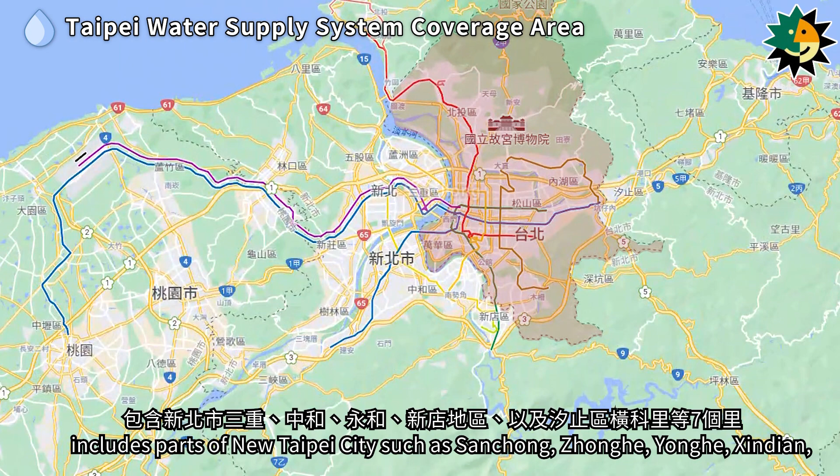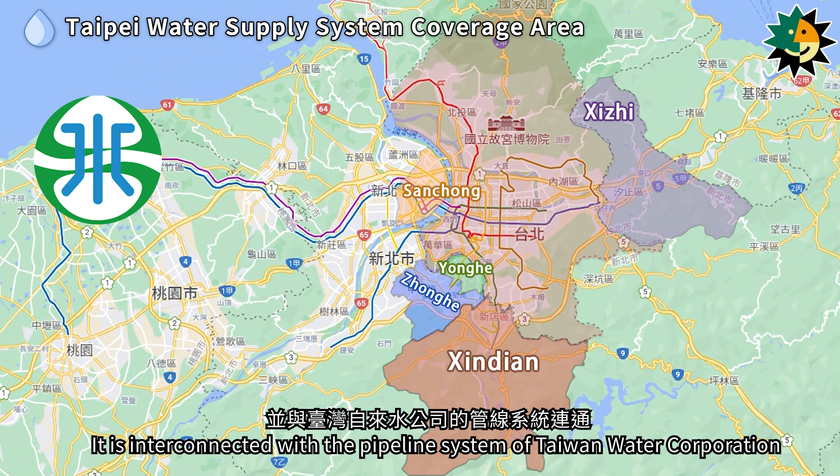The Taipei water supply system, centered around Taipei City, includes parts of New Taipei City such as Sanchong, Zhonghe, Yonghe, Xindian, as well as Hengke Village in Xizhi District and 7 other villages. It is interconnected with the pipeline system of Taiwan Water Corporation and regularly supports areas like Banqiao, Luzhou, Xinzhuang, Tamsui, Sanzhi, Xizhi, and Shenkeng in New Taipei City.

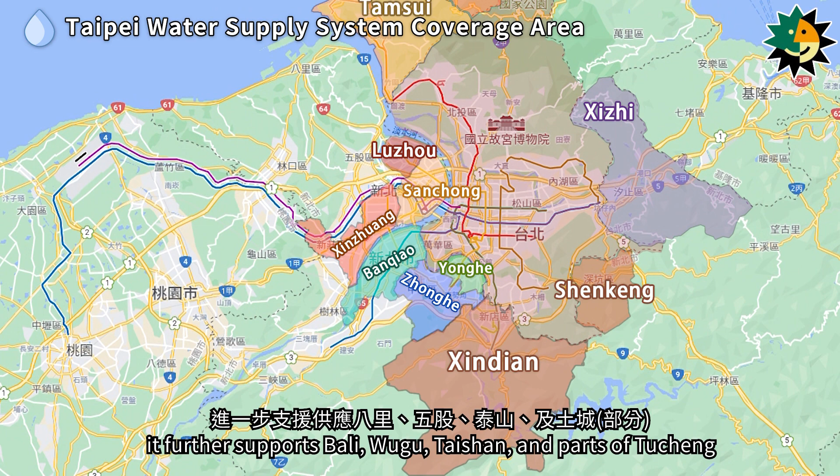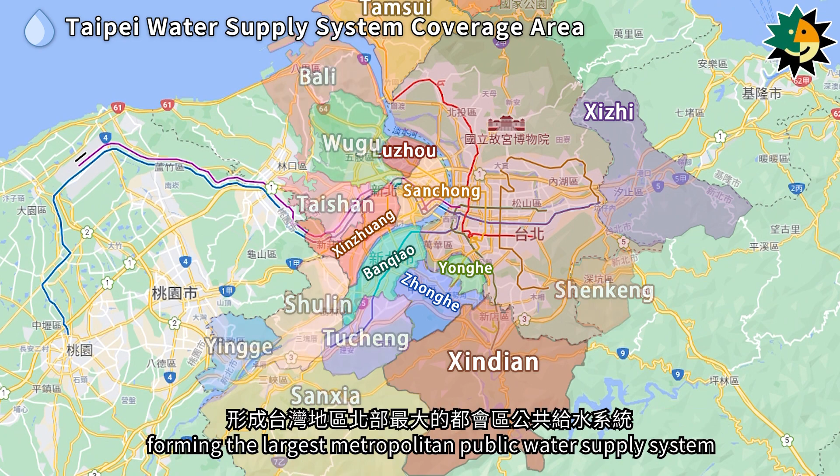With the completion of the first phase of the Banxin Area Water Supply Improvement Project, it further supports Bali, Wugu, Taishan, and parts of Tucheng. The second phase will expand support to Shulin, Yingge, Sanxia, and Tucheng in the Banxin area, forming the largest metropolitan public water supply system in northern Taiwan.

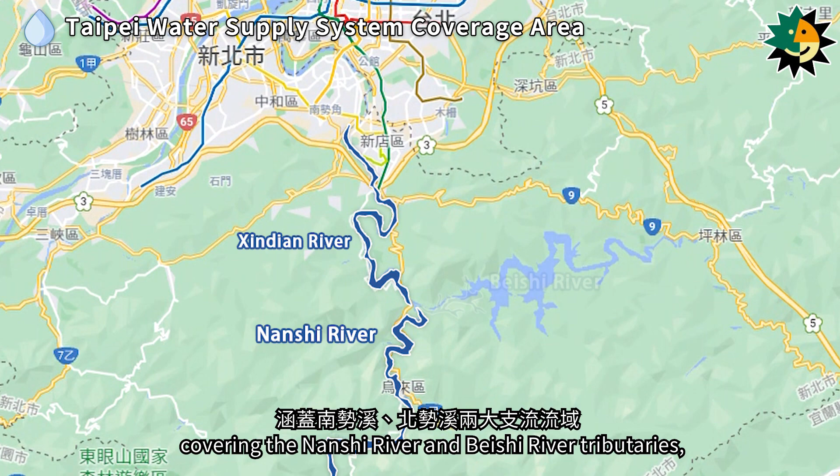The water distribution network spans over 3,000 kilometers. The Xindian River is the main headwater for the Taipei Metropolitan area, covering the Nanshi River and Beishi River tributaries, with catchment areas in Shiding, Xindian, Pinglin, Wulai, and Shuangxi, providing over 97% of the water for the Taipei metropolitan area.

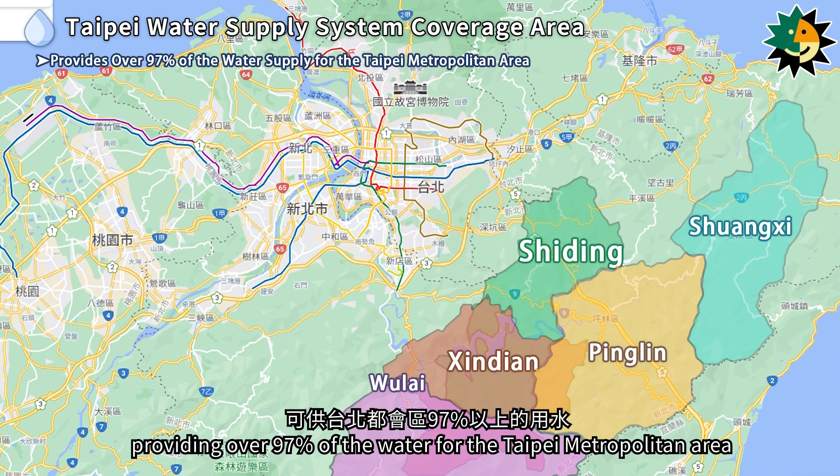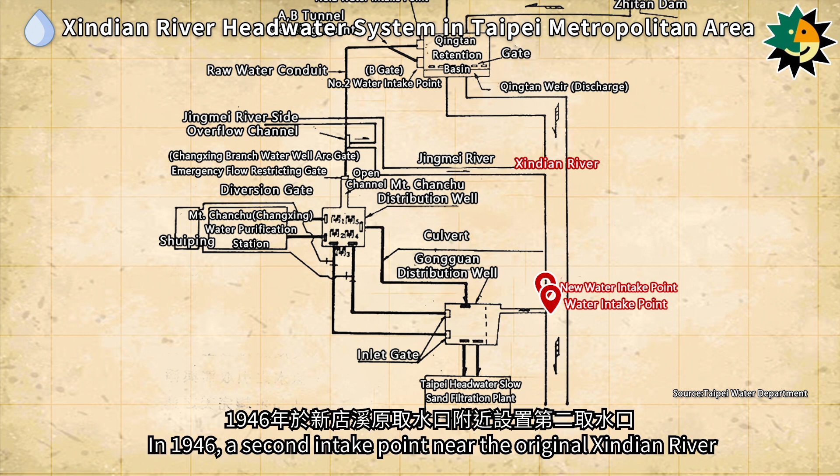In 1907, a water intake point was established at the lower reaches of the Xindian River, and in 1908, a pump room was completed to supply the Taipei Headwater Point slow sand filtration plant. In 1946, a second intake point near the original Xindian River intake point was established, and 2 additional pumps were added in 1949. Rapid sand filtration equipment was installed in 1952.

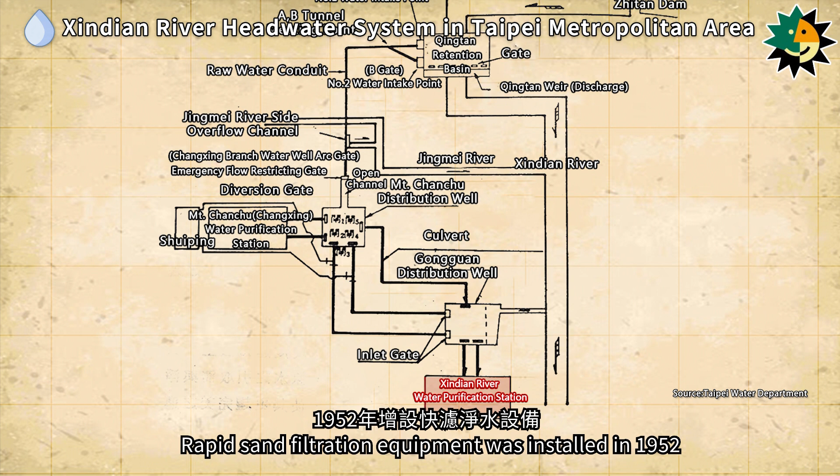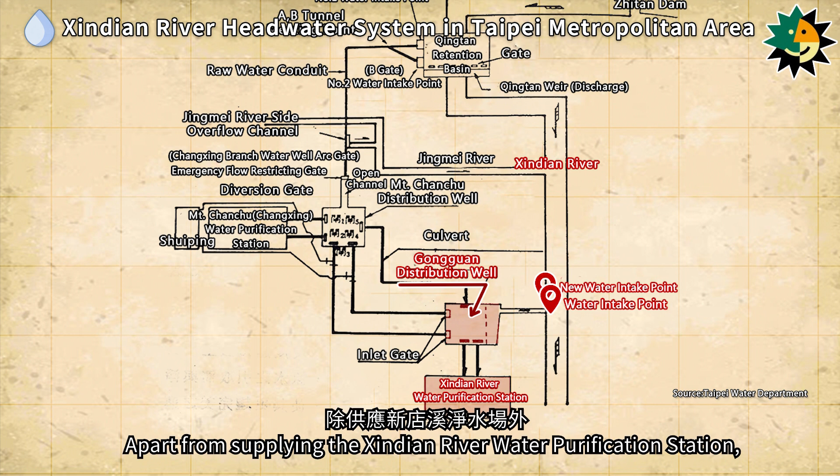Water from both intake points at the Xindian River is directed to the Gongguan Water Distribution Well. Apart from supplying the Xindian River Water Purification Station, it also supports the first phase of the Taipei Water Supply Expansion Plan, which began in 1962 and was completed in 1965.

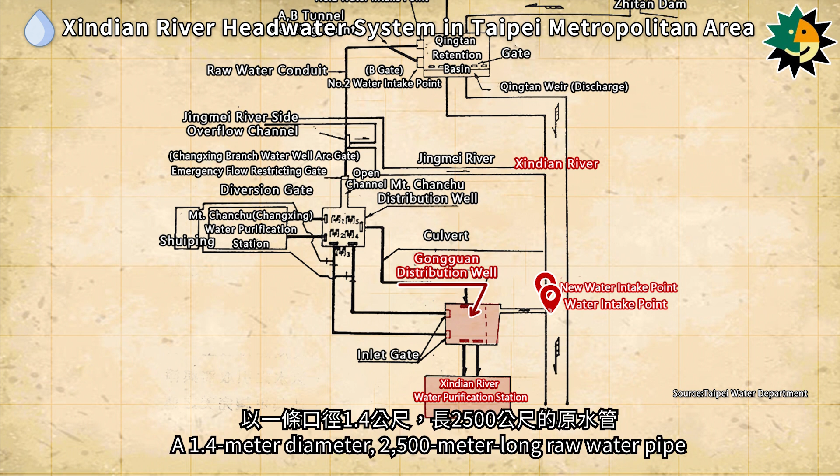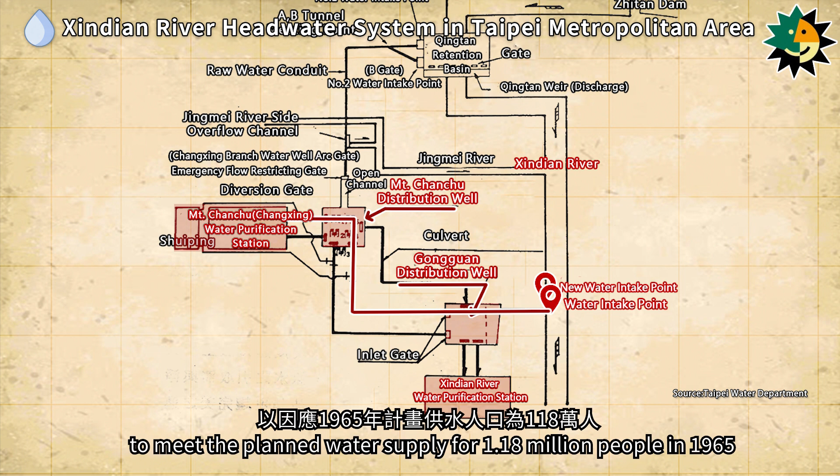A 1.4-meter diameter, 2,500-meter long raw water pipe was constructed to deliver water to the Chanchu Mountain Water Distribution Well, providing water to the newly established Chanchu Mountain Water Purification Station to meet the planned water supply for 1.18 million people in 1965. In 1971, to support the second phase of the Taipei Water Supply Expansion Plan, another 1.4-meter diameter raw water supply channel was added.

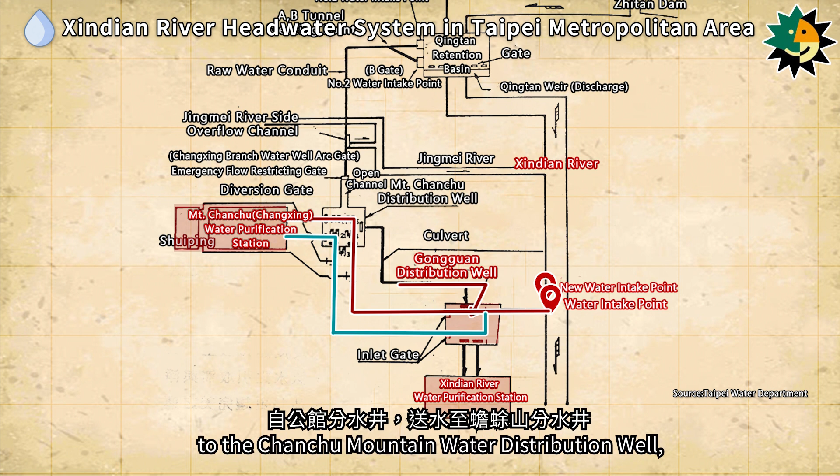From the Gongguan Water Distribution Well to the Chanchu Mountain Water Distribution Well, increasing the headwater for the Chanchu Mountain Water Purification Station.

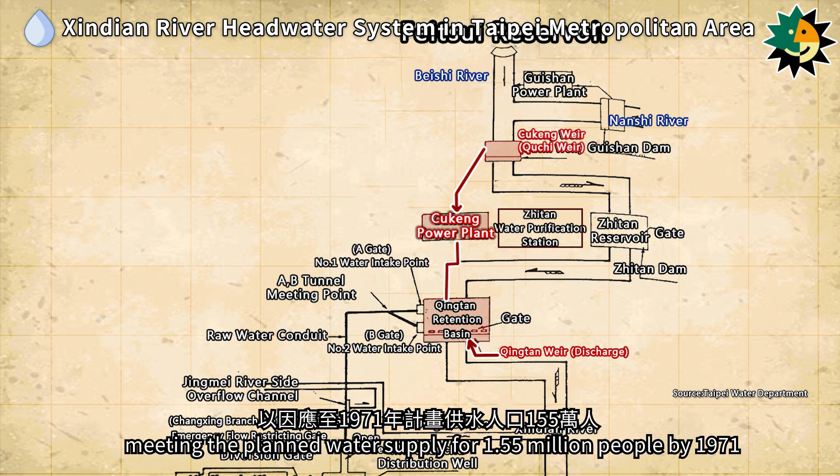Additionally, in 1965, Taiwan Power Company added 2 vertical rising sluice gates at the Quchi Weir to divert water for the Cukeng hydropower plant. The tailwater from peak power generation was also used to supply the Qingtan Weir for the Water Purification Station, meeting the planned water supply for 1.55 million people by 1971.

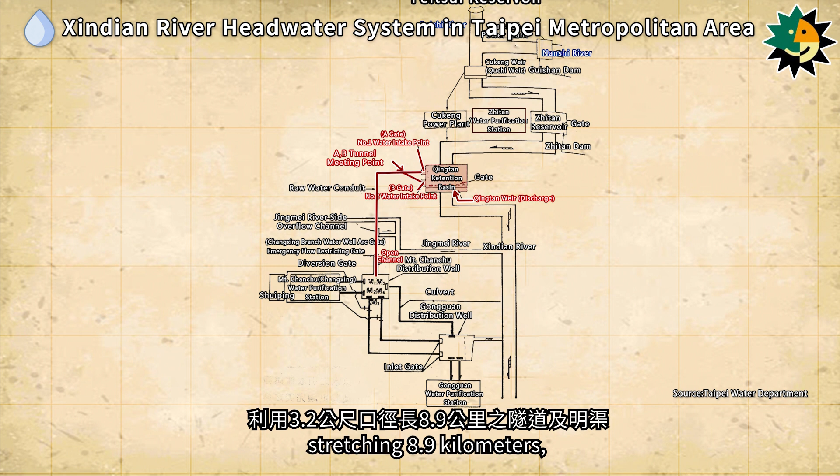In coordination with the third phase of the Taipei Water Supply Expansion Plan, the Qingtan Weir was completed in 1976. It features 2 water intake points and utilizes a 3.2-meter diameter tunnel and open channel, stretching 8.9 kilometers, to channel water into the Chanchu Mountain Water Distribution Well, supplying the Changxing Water Purification Station.

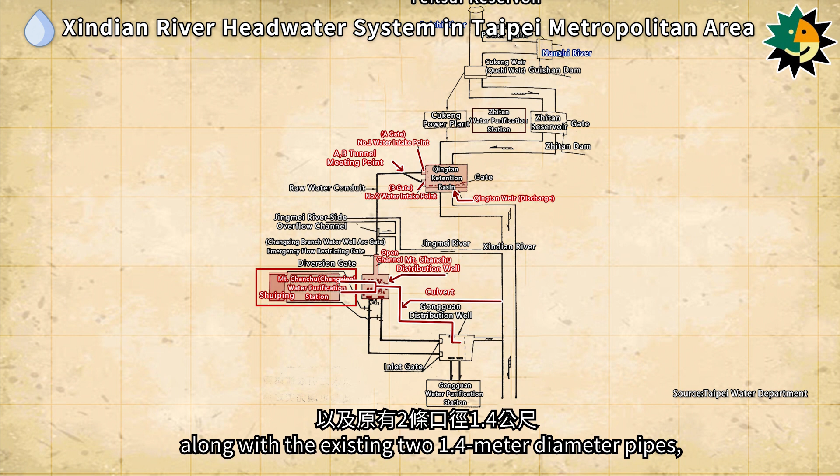Additionally, a new 2-meter diameter culvert and tunnel, 2.07 kilometers long, were added, along with the existing 2 1.4-meter diameter pipes, to transport water to the Gongguan Water Distribution Well, serving the newly constructed Gongguan Water Purification Station.

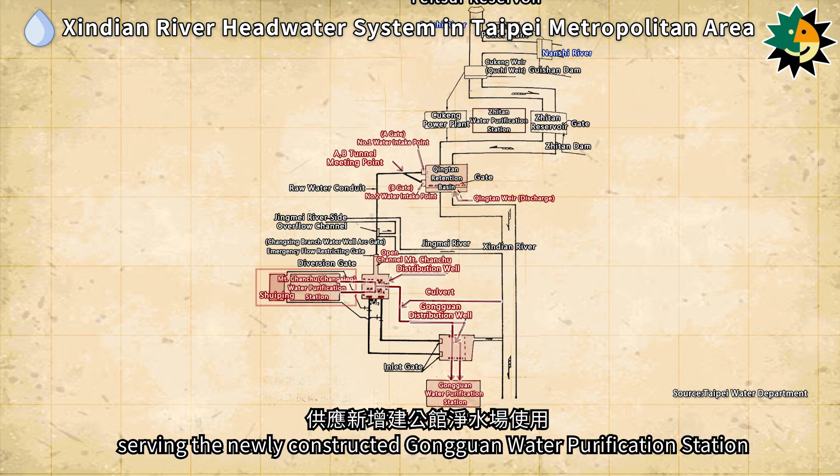In 1978, the Zhitan Dam was completed to supply raw water to the Zhitan Water Purification Station, meeting the planned water supply for 2.68 million people.

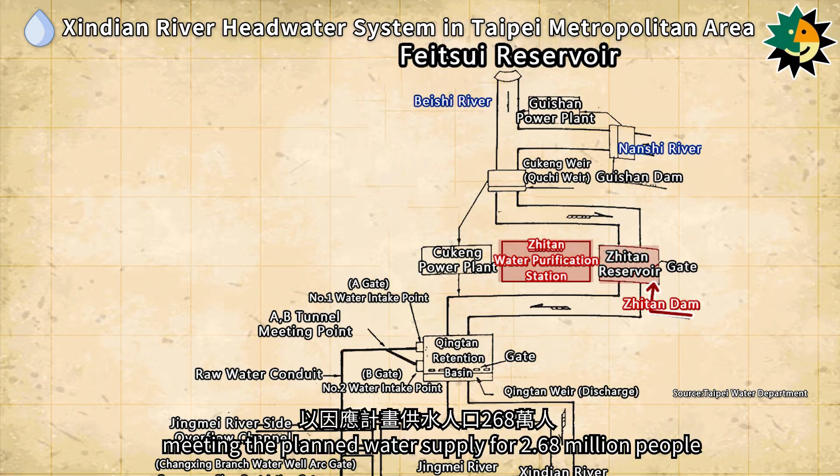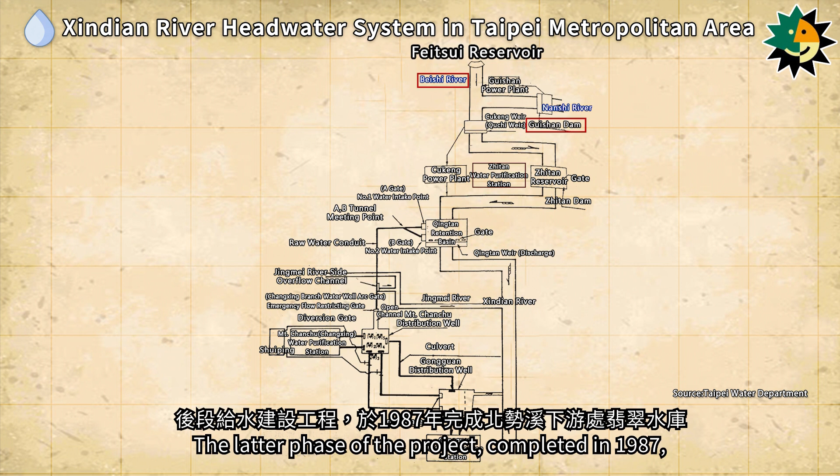In coordination with the first stage of the fourth phase of the Taipei Water Supply Expansion Plan, the third water purification facility at the Changxing Water Purification Station was built in 1972. The latter phase of the project, completed in 1987, saw the construction of the Feitsui Reservoir downstream of Beishi River. This reservoir, in conjunction with the water source from Nanshi River, was utilized to regulate and supply water to the Gongguan, Changxing, and Zhitan Water Purification Stations.

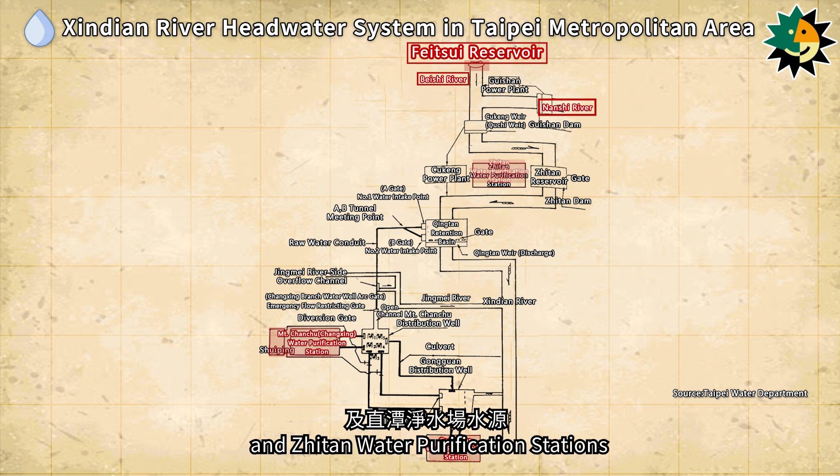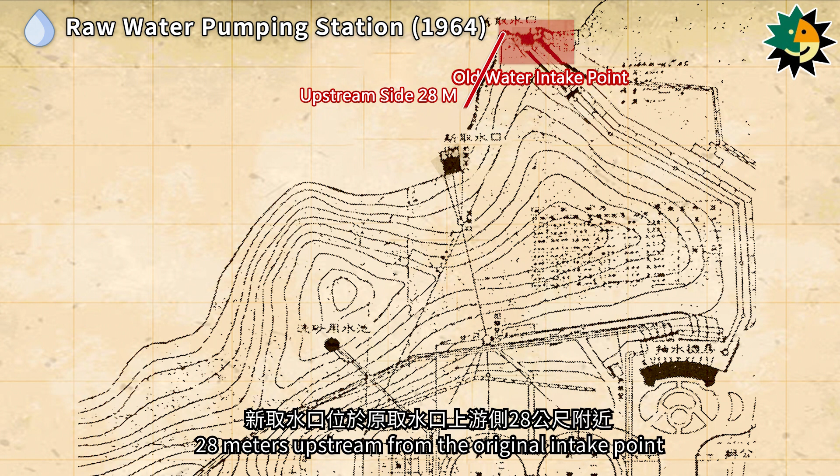Due to the decreasing water level of the Xindian River, a new water intake point was established in 1946, 28 meters upstream from the original intake point at the lower reaches of the river.

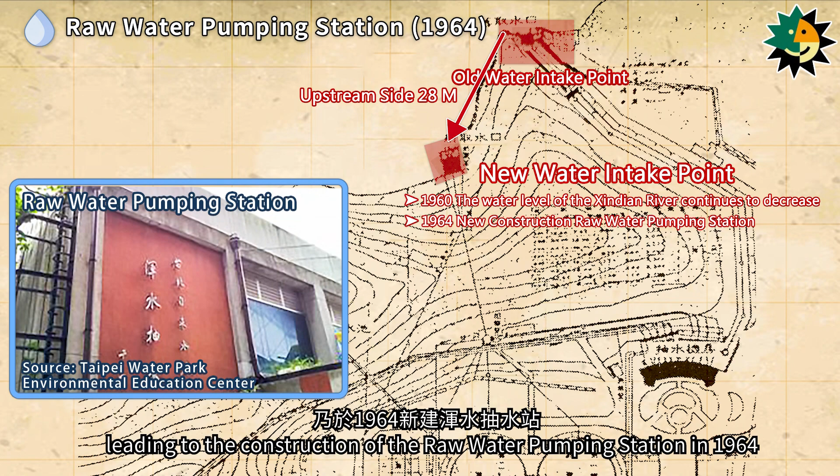By the early 1960s, this new water intake point became less effective as the river level continued to drop, leading to the construction of the raw water pumping station in 1964. Additional water pumps were gradually added to meet the water supply needs.

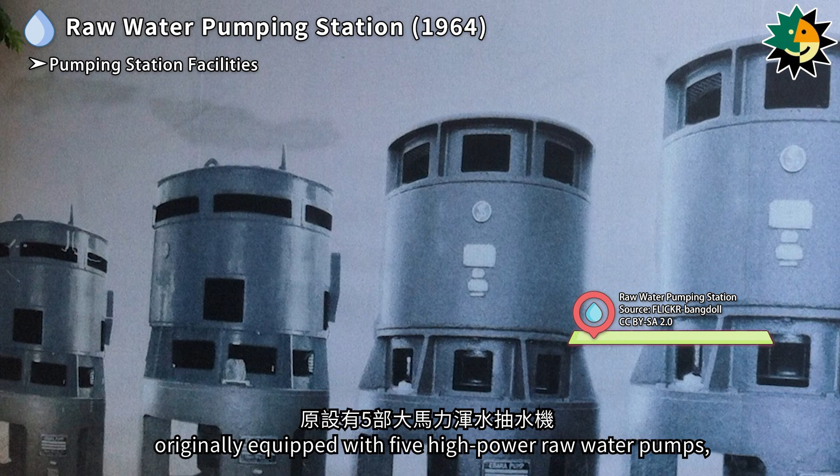The raw water pumping station is constructed of reinforced concrete, caisson foundation infrastructure design. The building is divided into 2 levels. The upper level houses the pump room, originally equipped with 5 high-power raw water pumps, and later 11 smaller horsepower motors were added. The lower level is the water pipe room, with a side room for the electrical distribution control panel room. After its retirement in 1976, the station was listed as a historic building and is currently being renovated to become a riverside scenic restaurant.

Located on the Xindian River at Shaochukeng, downstream of the Chukeng power plant and upstream of the Bitan scenic area, Qingtan Weir was commissioned in 1976. It is a gate-controlled floating concrete weir.

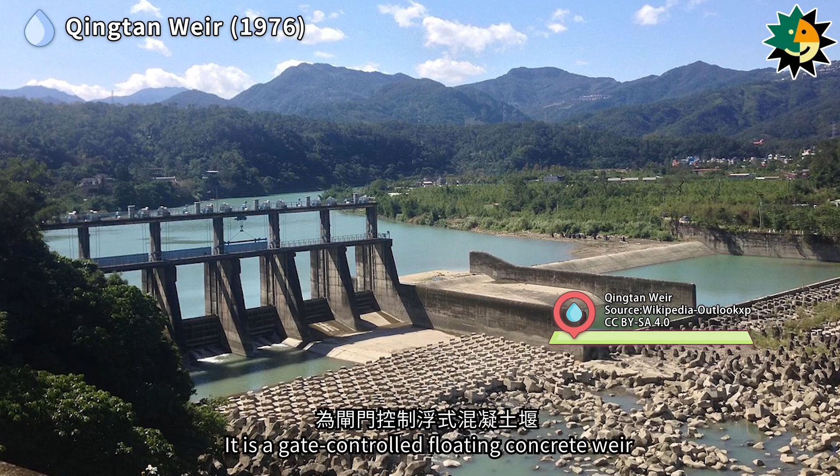The gate section of the weir is 69.6 meters long, divided into 6 openings by 6 1.6-meter thick bridge piers, each opening being 10 meters wide. The non-gate section is 128 meters long, making the total length of the weir 197.6 meters. It has an effective regulation capacity of 70,000 cubic meters, with the highest regulation water level at 22.6 meters.

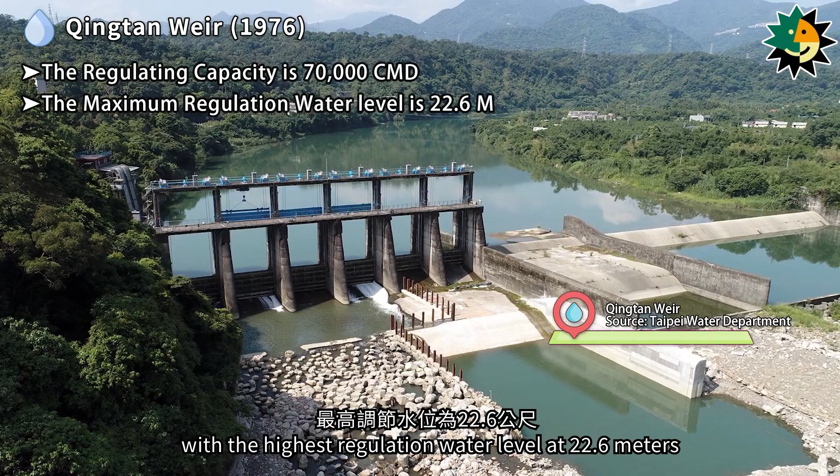The Qingtan Weir is equipped with a water intake point, with a daily capacity of 1.08 million cubic meters, and a raw water diversion pipe that is 11,119 meters long.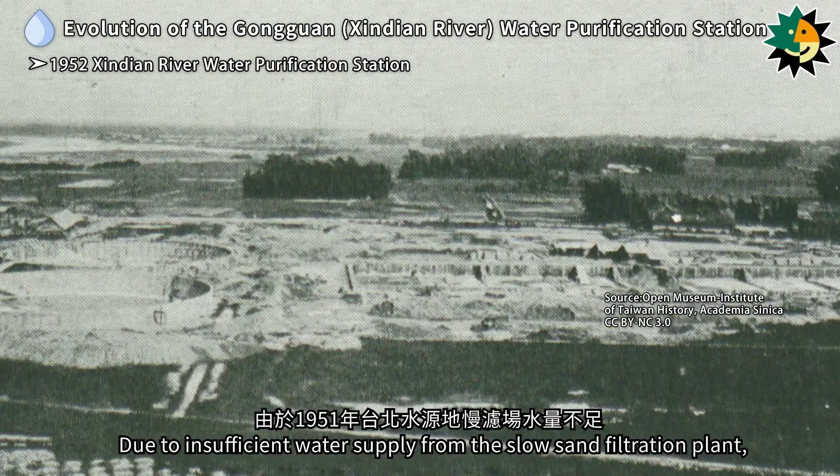The Taipei Headwater Point Slow Sand Filtration Plant was completed in 1909. Due to insufficient water supply from the slow sand filtration plant, a rapid sand filtration plant was constructed adjacent to it in 1951 and completed in 1952. It was renamed the Xindian River Water Purification Station.

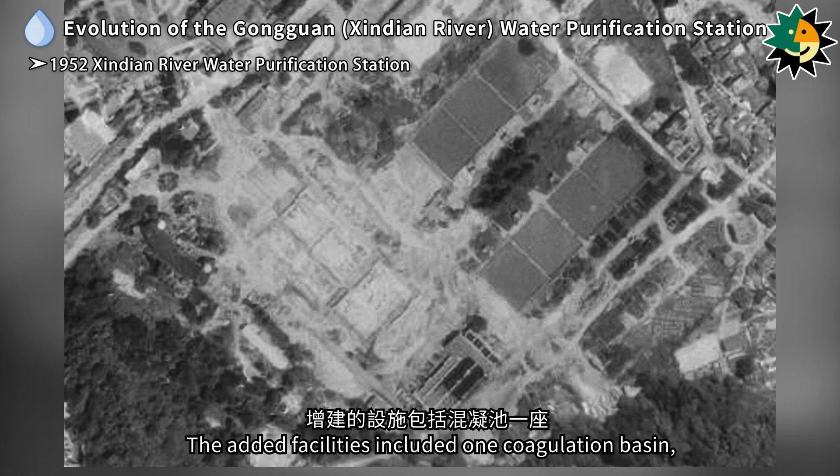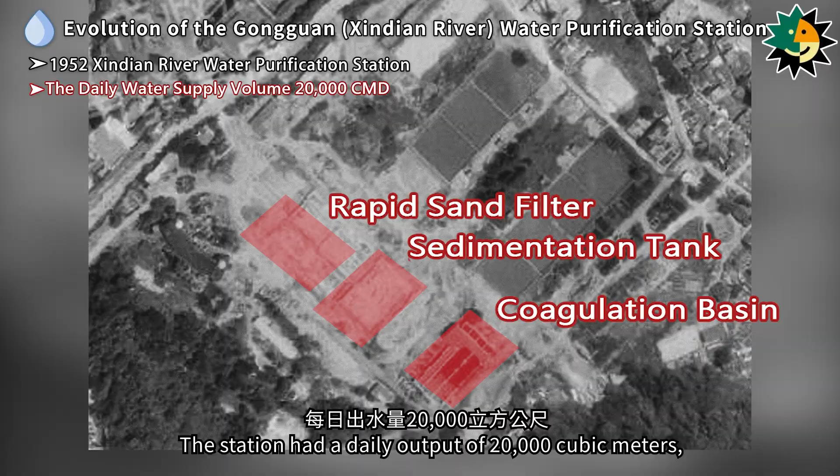A new water intake point was also established near the original intake point at the lower reaches of the Xindian River, with water being directed to the purification station through a pump room. The added facilities included 1 coagulation basin, 2 sedimentation tanks, and 4 rapid sand filters. The station had a daily output of 20,000 cubic meters, supplying domestic water to the Taipei City Walls area.

In 1974, the slow sand filtration plant was decommissioned and demolished, and the site was rebuilt as the Gongguan Water Purification Station, which utilizes rapid sand filtration for water purification.

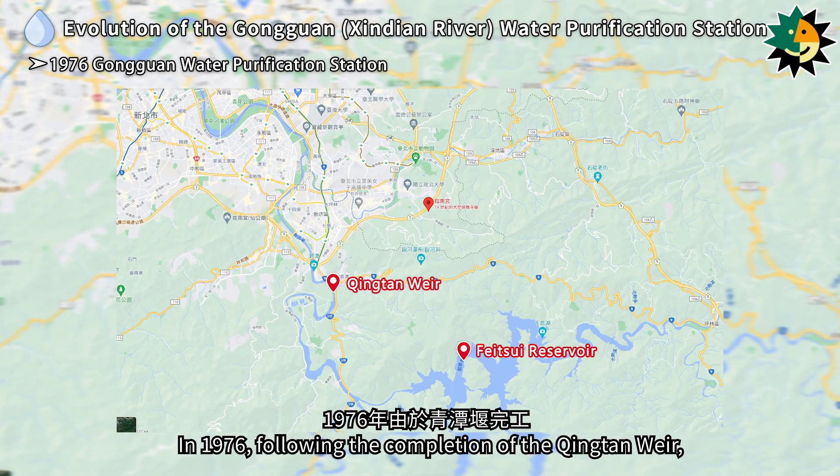In 1976, following the completion of the Qingtan Weir, the Gongguan Water Purification Station added a rapid sand filtration facility with a daily distribution capacity of 480,000 cubic meters.

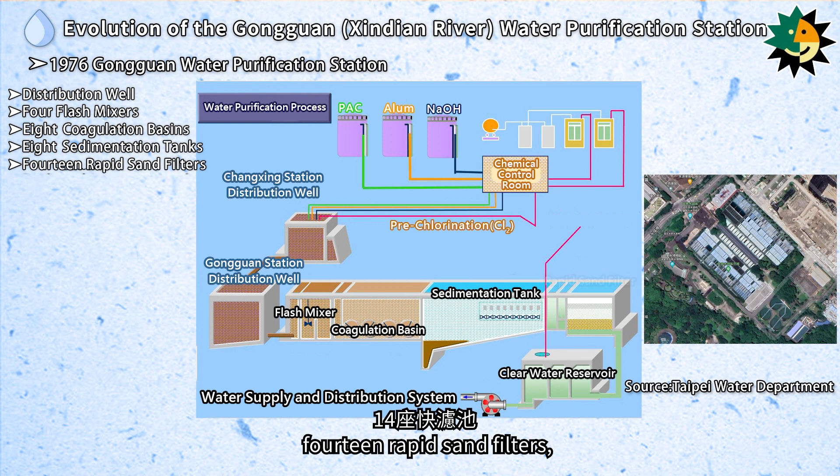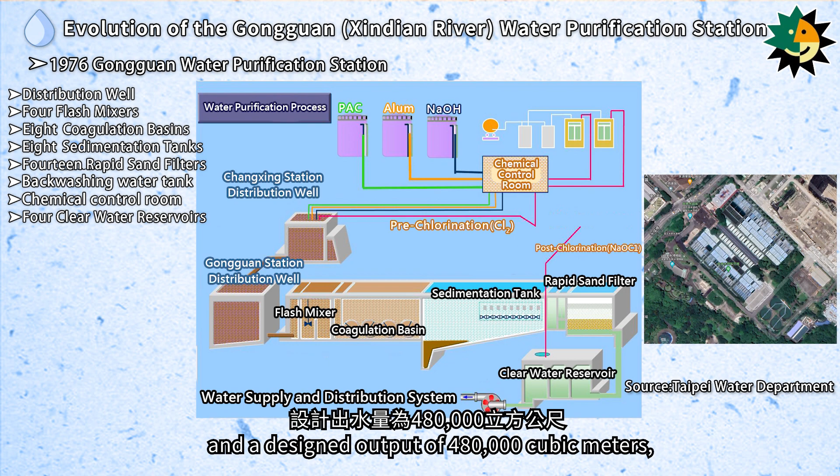The Gongguan Water Purification Station's facilities include a distribution well, 4 flash mixers, 8 coagulation basins, 8 sedimentation tanks, 14 rapid sand filters, a backwashing water tank, a chemical control room, and 4 clear water reservoirs. The station has a daily raw water purification capacity of 520,000 cubic meters and a designed output of 480,000 cubic meters, supplying domestic water to Zhongzheng, Wanhua, and Wenshan districts of Taipei City.

By 1958, Taipei's population had exceeded 800,000, and the water supply was only about half of the normal demand. Considering the limited water quantity and distribution distance of the water supply system, the Water Supply Construction Committee was established to plan long-term water supply projects.

The first step was to plan a new Changxing Mountain Water Purification Station at Changxing Street at the foot of Chanchu Mountain. The Changxing Mountain Water Purification Station was built in 3 phases, with planned facilities including 3 water purification units, Phase 1 East and West, Phase 2 East and West, and Phase 3 East and West. In 1965, the first water purification unit was completed with a daily output of 20,000 cubic meters.

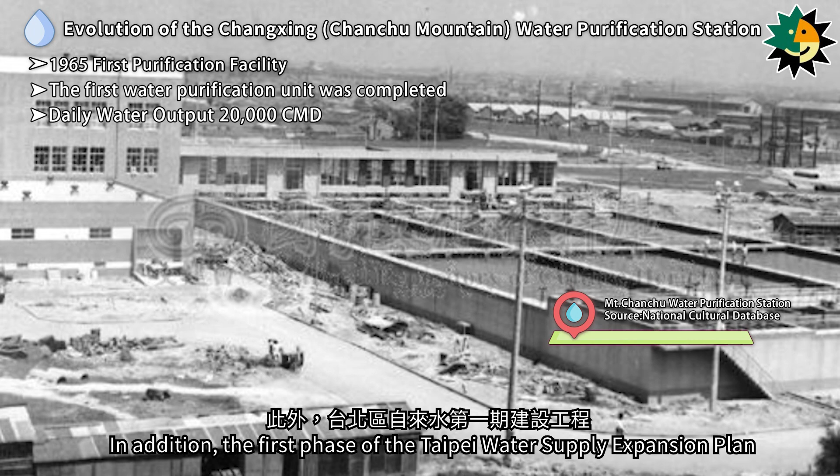In addition, the first phase of the Taipei Water Supply Expansion Plan includes the construction of 3 deep wells, 3 large elevated distribution reservoirs, and the installation of over 300 kilometers of new water supply and distribution pipelines, extending the supply area to include Sanchong, Shilin, Yonghe, Zhonghe, Qingmei, Xindian, and Muza.

In 1968, the second phase of the Taipei Water Supply Expansion Plan commenced with the expansion of the Changxing Mountain Water Purification Station. By 1971, the second water purification unit was completed, along with a check dam, raw water pumps, water diversion pipes, water distribution pipes, and deep wells.

In addition to supplying Sanchong, Shilin, Yonghe, Zhonghe, Qingmei, Xindian, and Muza, the service area was further expanded to include Neihu, Nangang, Shilin, and Beitou.

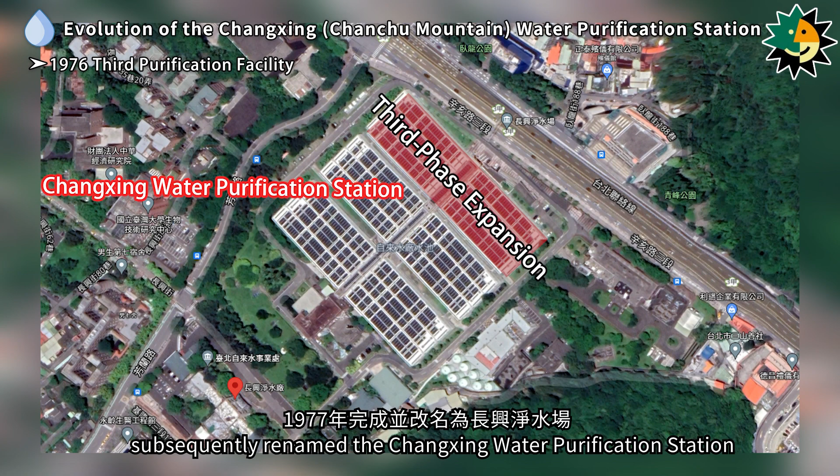The third purification facility was constructed in 1976 as part of the first stage of the fourth phase of the Taipei Water Supply Expansion Plan and was completed in 1977, subsequently renamed the Changxing Water Purification Station. The facility includes 6 coagulation basins, 18 sedimentation tanks, 9 rapid sand filters, 4 clear water reservoirs, and 2 flash mixers.

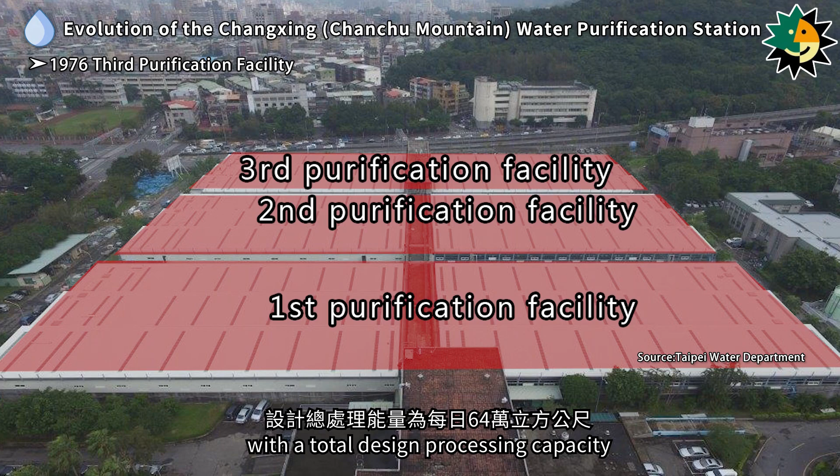The first and second purification facilities each had a design processing capacity of 200,000 cubic meters per day, and the third facility had a capacity of 240,000 cubic meters per day, with a total design processing capacity of 640,000 cubic meters per day, supplying domestic water to Da'an and Xinyi districts of Taipei City.

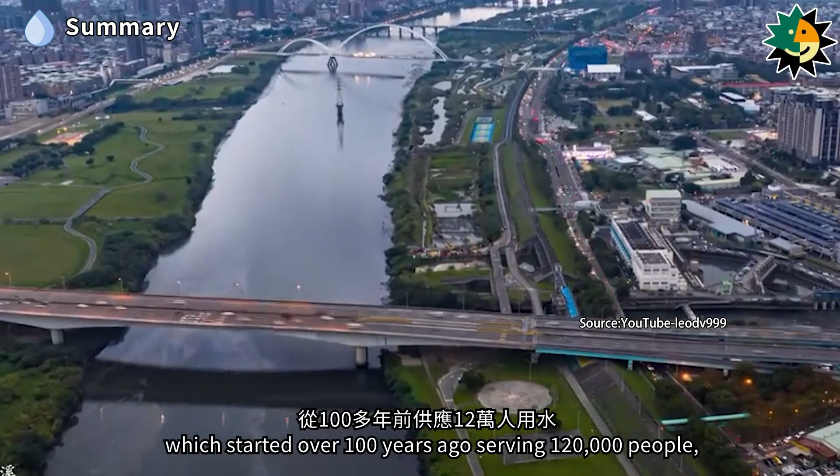The Taipei Metropolitan Area Water Supply System, which started over 100 years ago serving 120,000 people, has developed to the point where it now supplies water to 6 million people in the Taipei metropolitan area.

Over time, to ensure a sufficient and clean water supply, water intake points were initially set up in the lower reaches of the Xindian River and gradually moved upstream with the construction of weirs, leading to the building of the Feitsui Reservoir to regulate the water supply for the water purification stations.

The main water purification stations in the Taipei metropolitan area currently are the Changxing Water Purification Station, Gongguan Water Purification Station, and Zhitan Water Purification Station. The previous episode introduced the water purification stations from the Japanese colonial period. This episode covers the Qingtan Weir, Gongguan Water Purification Station, and Changxing Water Purification Station, and the next episode will introduce the Feitsui Reservoir, Zhitan Weir, and Zhitan Water Purification Station.

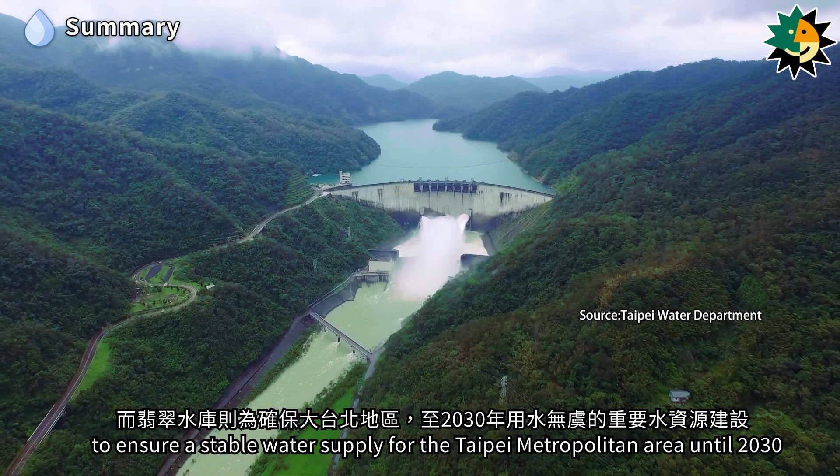The Zhitan Water Purification Station currently supplies 70% of the water for the Taipei metropolitan area, and the Feitsui Reservoir is an important water resource development to ensure a stable water supply for the Taipei metropolitan area until 2030. It needs to be properly maintained, and its resources should be cherished and utilized effectively.